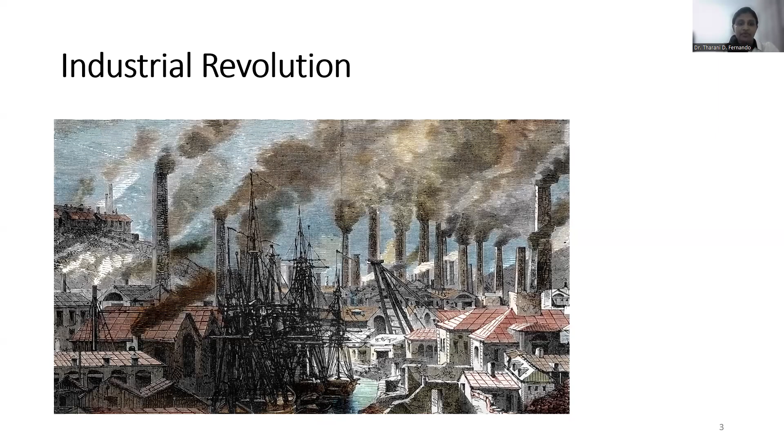Industrial wastewater is one of the major sources contributing to water pollution today. Here you can see different types of industries. Different industries generate different types of wastewater, each containing a unique mix of contaminants. For example, textile factories, food processing plants, chemical industries all produce very different kinds of effluent.

Because of this variation, industrial wastewater is not something we can treat with one approach. The treatment method needs to be carefully designed considering the specific types of pollutants found in each industrial wastewater. So understanding the source and the composition of the wastewater is the first step towards effectively managing it.

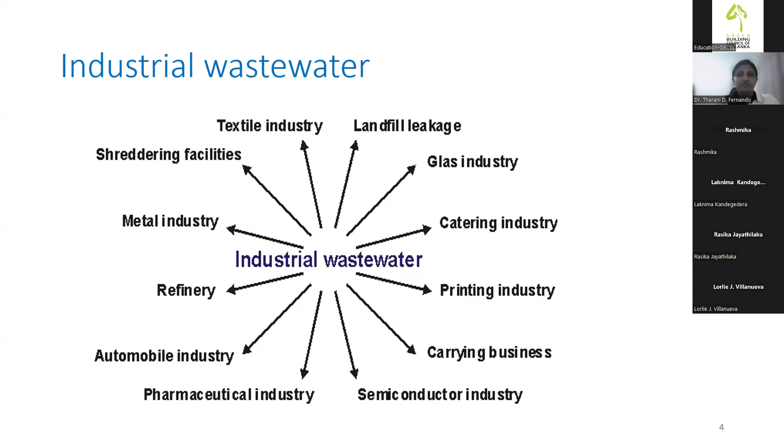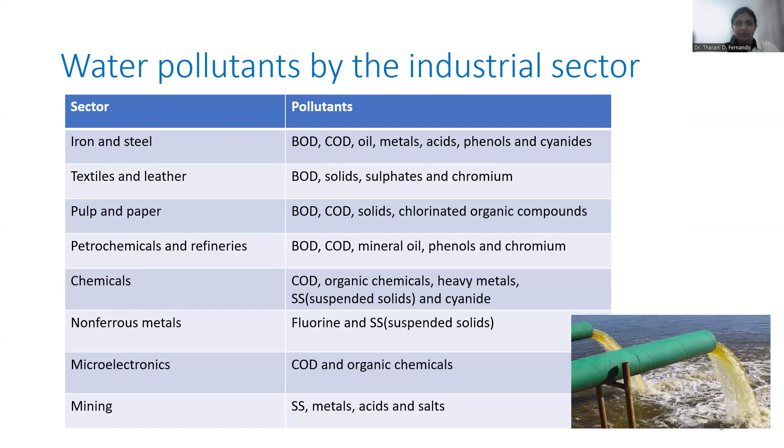As mentioned previously, here you can see the difference in the types of pollutants with the type of industry. Especially when we are talking about the iron and steel industry, you can see the pollutants, and for the chemical industry, you can see the pollutant types. These are not all pollutant types, but here I have mentioned the major pollutants from these industries.

I'm sure many of you have seen water bodies like this, where the surface is covered with a greenish layer. You might have wondered, what is that? Those are algal blooms. To grow rapidly like that, they need the right conditions. What are those right conditions? Right conditions are sunlight and nutrients.

When industrial wastewater is released into water bodies, especially if rich in nitrates and phosphate, it creates a perfect environment for these algal populations. This can lead to excessive algal growth, which we call eutrophication. That is the process here, eutrophication, and it has serious impact on aquatic life and water quality.

Now, after these algal blooms die, they don't just disappear. They sink to the bottom of the lake, and that's where microorganisms start breaking them down, especially aerobic bacteria. During this process, they use dissolved oxygen in the water for degradation. As more algal population decomposes, more dissolved oxygen is consumed by these microorganisms, and the oxygen level in the water starts to drop significantly.

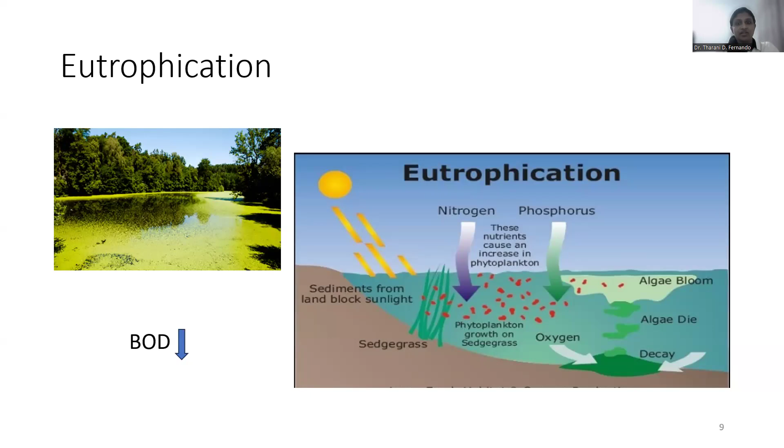That is a sign that the ecosystem is under stress. On the other hand, this lack of oxygen is very harmful to aquatic life, especially for fish and other organisms that depend on oxygen.

Now, in addition to nutrients like nitrate and phosphates, industrial wastewater can also contain some highly dangerous substances. First, we have heavy metals such as mercury, lead, cadmium, and arsenic. These metals don't break down easily and can accumulate in the food chain over time, reaching humans through fish and other aquatic life.

Next are toxic organic pollutants, things like pesticides, industrial solvents, and petrochemicals. These can cause serious health problems including cancer, hormone disruptions, and neurological diseases.

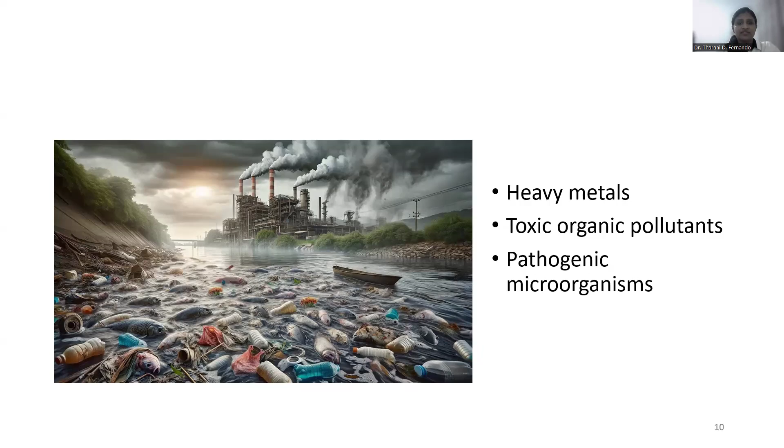And finally, in some cases, industrial effluents may also contain pathogenic microorganisms: disease causing bacteria like Vibrio cholerae and Salmonella typhi, viruses like hepatitis, or parasites. When these enter our water bodies, they pose a direct threat to public health, especially in communities that rely on these sources for drinking and bathing purposes.

These heavy metals and pathogenic microorganisms not only contribute to human diseases and even deaths, but they also have a broader impact beyond health. They affect the country's economy by increasing healthcare costs, raising the expenses for wastewater treatment, and even causing a decline in tourism, especially in areas where water bodies are polluted or unsafe.

These species are placed under serious risk as aquatic organisms are threatened due to this wastewater pollution. This is inhibiting the activities of these aquatic organisms and also poisoning their food sources, which can also be a cause for the extinction of these aquatic organisms.

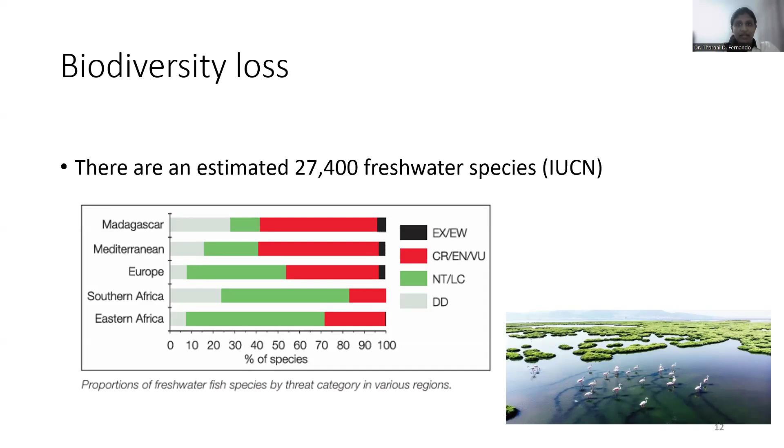To control these harmful discharges and to protect not just the environment but also human health and the economy, there must be strong legislative frameworks. Laws and regulations are essential to monitor, manage, and minimize industrial wastewater pollution. Considering the rapid advancement in industrial technologies and evolving environmental needs, several amendments have been made to existing regulations over time, starting from as far back as 1980.

One key step was taken under the National Environmental Act number 53 in 2000, which identified specific industrial activities that require an environmental protection license. But even that was not enough, so the act was further amended in 2008 and again in 2022 to keep up with changing industrial practices.

Under environmental laws, certain industries need to follow key steps like getting an environmental protection license if their activities could seriously affect the environment, as outlined in gazette number 2264. If they deal with hazardous waste, they must have a scheduled waste management license. And for large developing projects, an environmental impact assessment has to be done before starting these industries, based on the guidelines in the relevant gazettes.

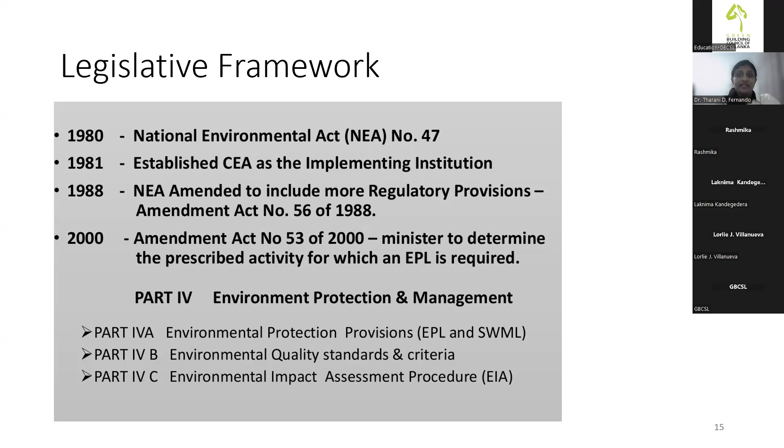Effluent monitoring and industrial inspections play an important role in controlling industrial water pollution. When it comes to enforcement, high and medium pollutant industries are monitored by the Central Environmental Authority, while low pollutant industries are monitored by local government authorities.

Regular inspections are also conducted. For high polluting industries, the environmental protection license is issued for a maximum of 1 year and inspections are done twice a year. For medium pollutant industries, inspections are carried out once a year.

In addition to that, industries are required to submit self-monitoring reports. These reports must include results from Central Environmental Authority registered laboratories as well as one report submitted to the Central Environmental Authority online. High pollutant industries must submit a report on a quarterly basis, while medium pollutant ones submit their reports biannually or annually depending on the risk level. These systems ensure that industries are kept within the safe limits.

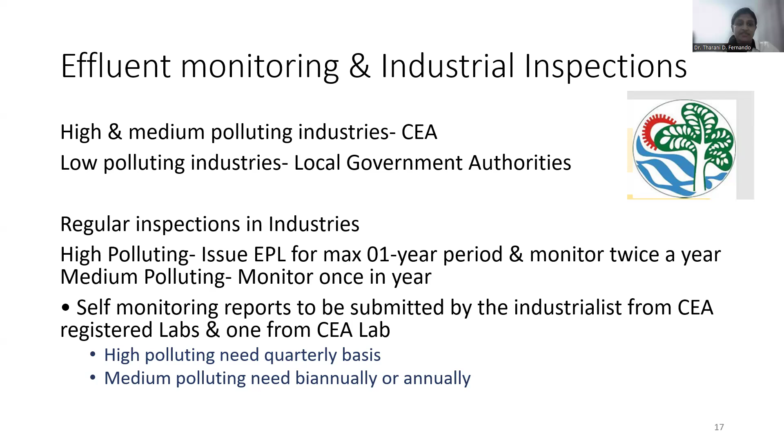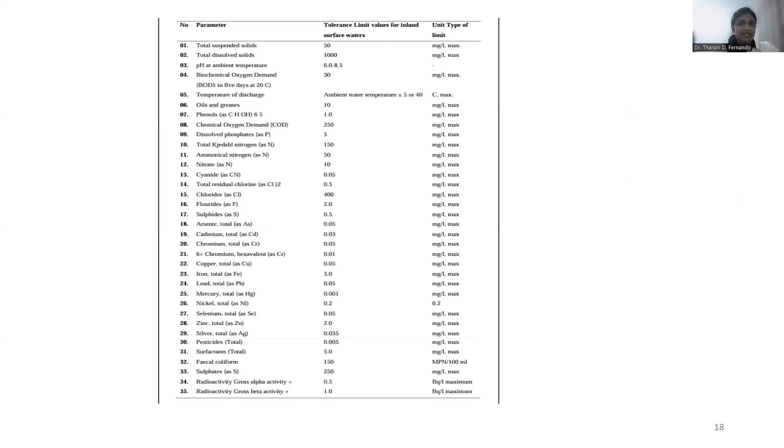Here you can see the tolerance limit values for inland water discharges. These values are taken from the BOI zone in Biyagama, especially from the common wastewater treatment plant. These limits are set to ensure environmental safety standards and minimize harm to the environment and human health.

So, to ensure safety, industries must treat their wastewater before discharging it into natural waterways. A general wastewater treatment plant has four main stages: preliminary, primary, secondary, and tertiary treatment. As we move from the preliminary stage to the tertiary stage, both the complexity and the cost of the treatment processes increase. Preliminary treatment involves basic physical processes like screening and grit removal. Primary and secondary treatment focuses more on settling solids and biological treatments. Tertiary treatment is used when very high water purity is needed, depending on the type of industry.

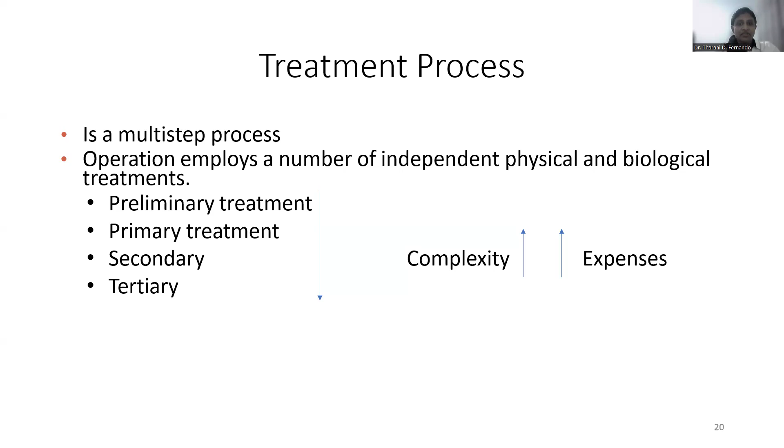Now, let's talk about the techniques used in the preliminary treatment stage. These include bar screening, grit removal, fat and grease removal. Here you can see an image of a bar screening unit.

It's one of the simplest engineering processes in wastewater treatment, but a very important one. Bar screens are placed at the very beginning of the treatment plant. The job of this bar screening is to remove large solid materials like pieces of wood, plastics that could damage or block pumps and other equipment in this wastewater treatment plant. And this step protects the rest of the treatment system.

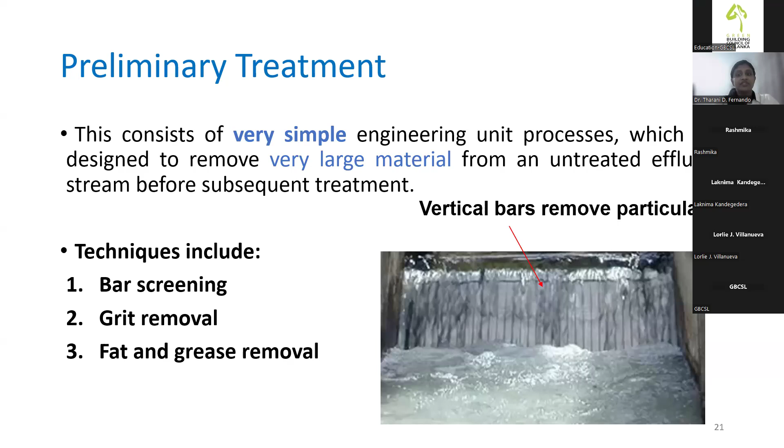This is a grit chamber, which is used in a preliminary treatment stage to remove grit from wastewater. Just like bar screening, grit removal is essential because if these particles are not removed, they can cause serious damage to pumps, pipelines, and other mechanical parts in the treatment plant. Grits include unwanted materials like sands, gravel, some stones, and other heavy particles that have a higher specific gravity than the organic matter in this wastewater stream.

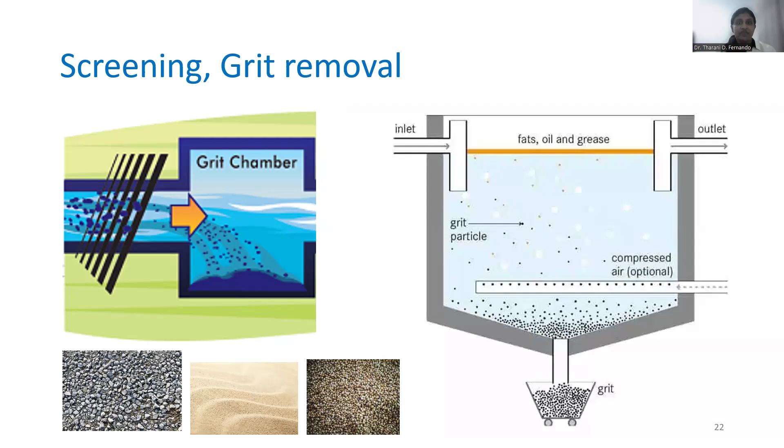Next, primary treatment stage. This involves the use of a sedimentation tank. In many industries, this stage also includes skimmers to remove fat, oil and grease from the surface of the water. Here in this picture, you can see a skimmer working on the surface of the sedimentation tank. During primary treatment, the wastewater is kept in the sedimentation tank for a few hours, normally between 1.5 to 2.5 hours to settle down the suspended solids.

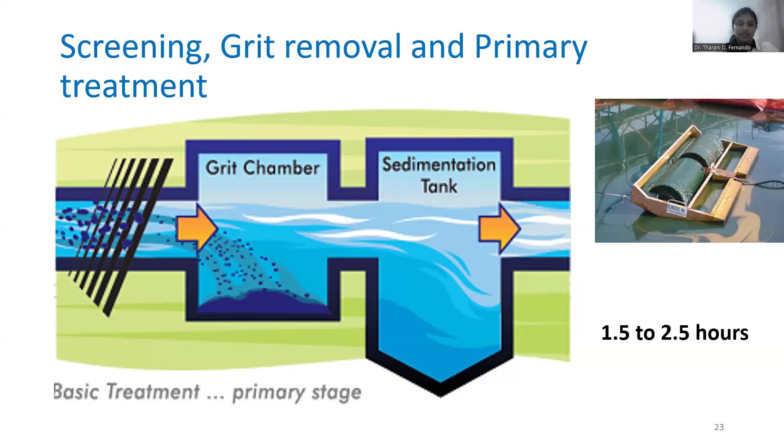Okay, now we are talking about primary treatment. A well-designed and properly operated sedimentation tank can remove about 25% to 40% of BOD. BOD means biological oxygen demand, indicating the organic content in water. And also around 50 to 70% of suspended solids. To improve the removal of solids, industries usually add flocculants or polymers to sedimentation tanks.

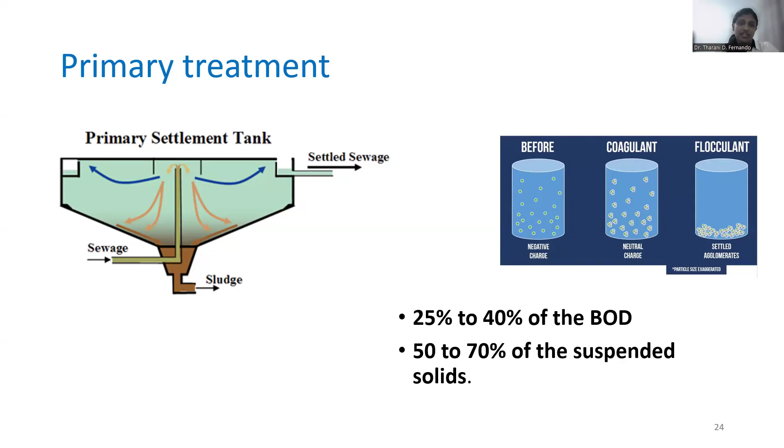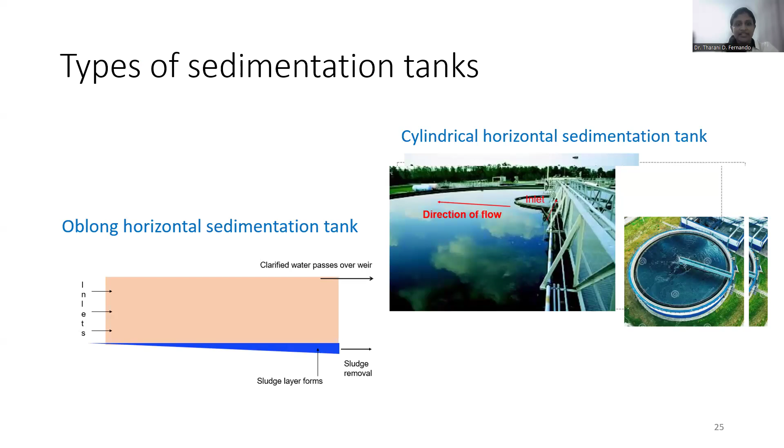Here you can see different types of sedimentation tanks: oblong horizontal sedimentation tanks and cylindrical horizontal sedimentation tanks, depending on the shape of the sedimentation tank. We discussed preliminary treatment and primary treatment. These are very simple techniques.

After the primary treatment, the water moves to the secondary treatment stage. This is a biological treatment process. In previous stages, we didn't use biological treatment processes. In this stage, we are using biological treatment processes. The main objective of this secondary treatment is to reduce biological oxygen demand, meaning to reduce the organic content in water. In industrial wastewater, the BOD level is very high, often around 1500 milligrams per liter. Through secondary treatment, this is brought down significantly, usually to the range of 5 to 30 milligrams per liter.

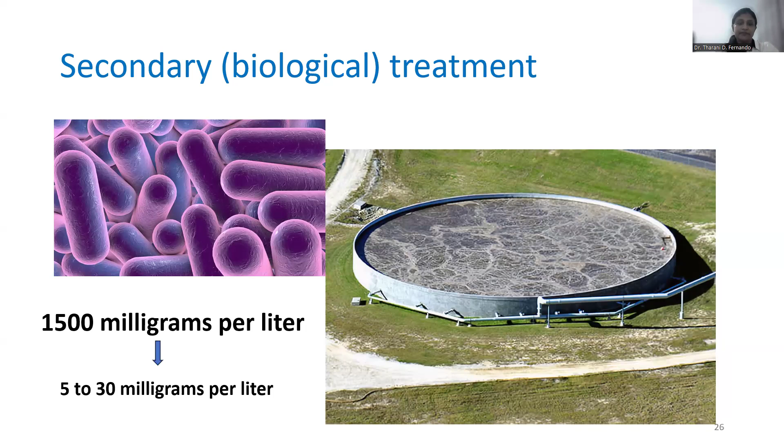The secondary treatment takes place in two main environments: aerobic condition and anaerobic condition. Aerobic conditions mean oxygen-available conditions. Anaerobic conditions mean oxygen-unavailable conditions. This type of environment has a significant impact on the treatment process. It affects three key aspects: the efficiency of the biological treatment, end products, and the completeness of breaking down of organic matter. So choosing the right environment is important depending on the treatment goals and the nature of the wastewater.

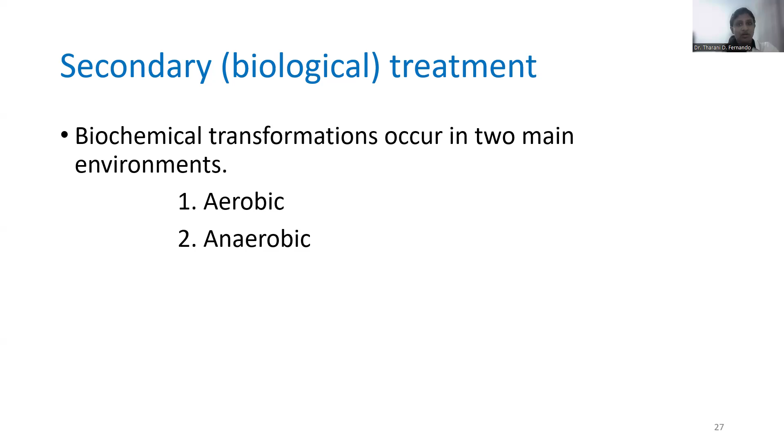When we talk about secondary treatment, in this session I am mainly focused on aerobic conditions. There are two main types: attached culture systems and suspended culture systems. In attached culture systems, the biomass grows on the surface of a medium or inside the medium, and the sewage flows over it. Two common examples of attached culture systems are trickling filters and rotating biological contactors.

Next one is the suspended culture system. Here, the biomass is mixed directly with the wastewater. Common examples are the activated sludge system and oxidation ditch. Each system has its own advantages depending on the design and the treatment goals.

In this video, you can see a trickling filter. That is an attached culture system. The rotating arms are sprinkling wastewater evenly over this bed, especially with stone media. This is non-toxic media for microorganisms. Microorganisms grow on the surface and inside this material. Okay, you can see a cross section of this trickling filter here. As the wastewater passes over it, biological degradation of the organic matter is happening.

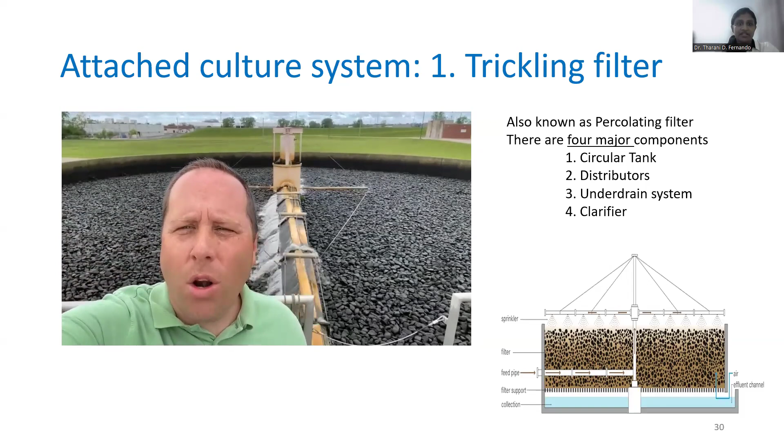Next, rotating biological reactor. This is the second example for attached culture system. In this system, microorganisms also grow on the surface and inside the rotating disc. Here, in industrial waste management systems, people are using discs in these rotating biological reactors. These discs are partially submerged in water, usually about 40%.

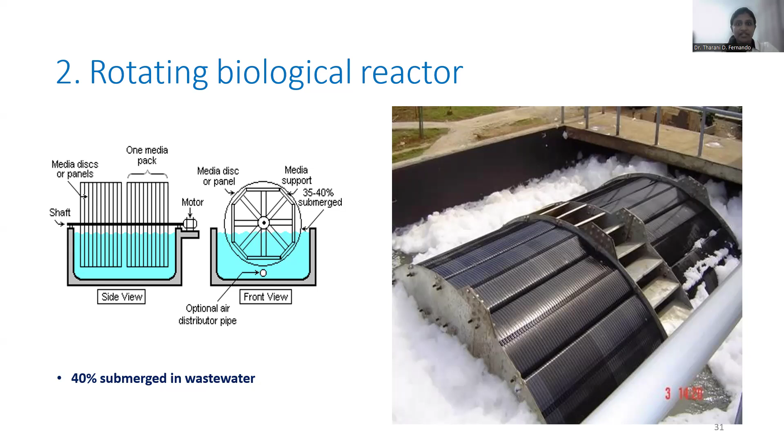When the disc is rotating, the biofilm, meaning the microorganisms on the surface of this disc, come into contact with both the wastewater and the atmosphere. When they are coming to the atmosphere, they can obtain oxygen. So far, we have been discussing the attached culture system. In the attached culture system, we discussed the trickling filter and rotating biological reactor.

In contrast to this attached culture system, in the suspended culture system, the wastewater is fully mixed with the microorganisms. There's a mixing of microorganisms and the wastewater. This allows for better contact between the organic matter and the microbes, and this enhances the efficiency of the treatment process. Here we can obtain 90 to 95% BOD reduction.

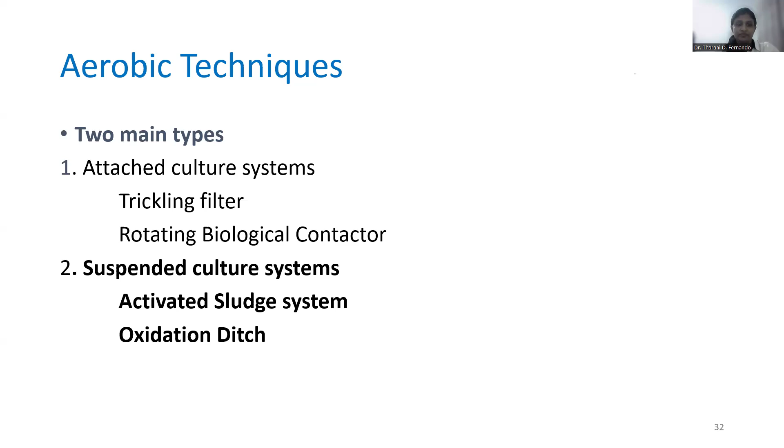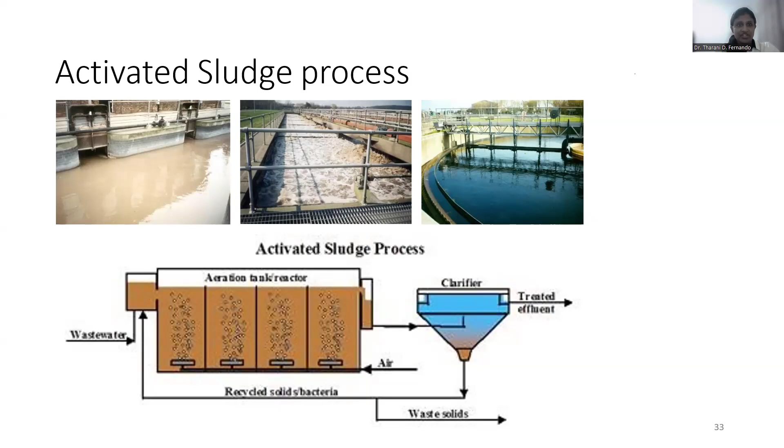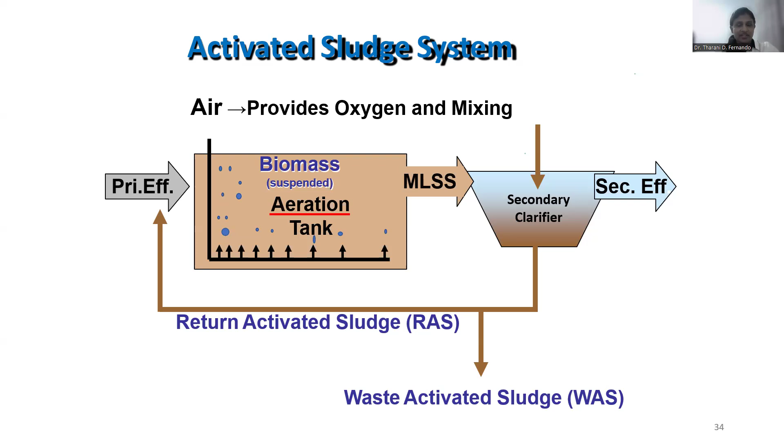In the activated sludge system, some of the activated sludge is returned to the aeration tank. This keeps a strong population of activated microbes in the tank that are ready to break down organic pollutants very effectively. In this picture you can see activated sludge returning into the aeration tank. This activated sludge is from the secondary clarifier.

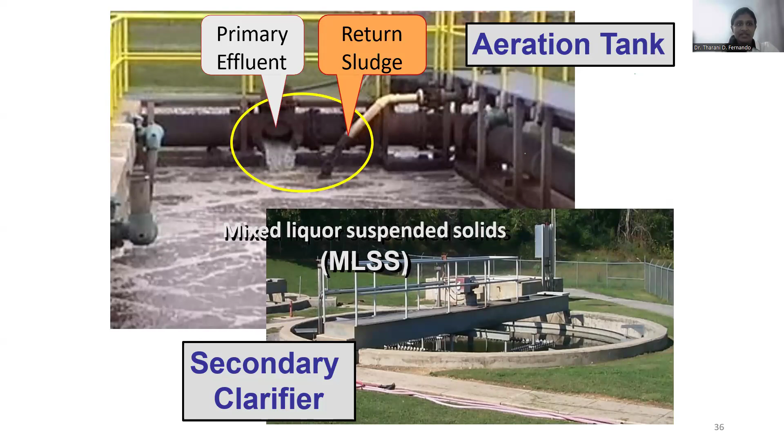Here you can see the aeration tank, secondary clarifier, primary effluents, and return sludge mixing and forming mixed liquor suspended solids. After the secondary clarification, we obtain a clear looking solution. Like this, we can obtain a clear looking solution.

However, even though it appears clear, it is important to verify its quality through laboratory analysis before releasing it into the natural waterways. This is to ensure that it meets regulatory guidelines for environmental safety. That is the reason for that. If needed, we can also proceed with tertiary treatment to further polish this effluent.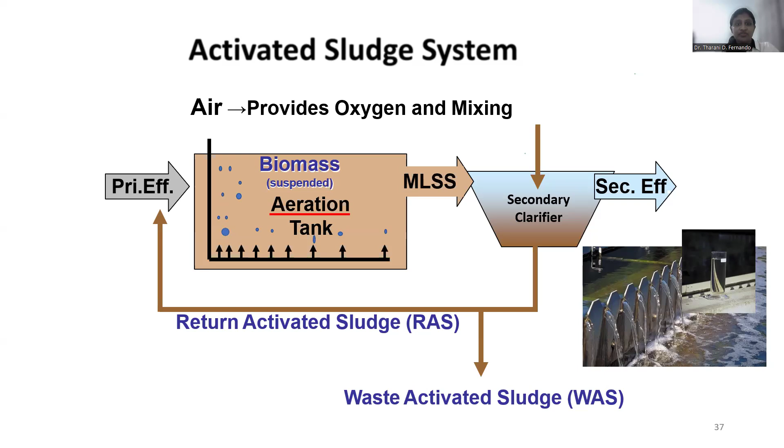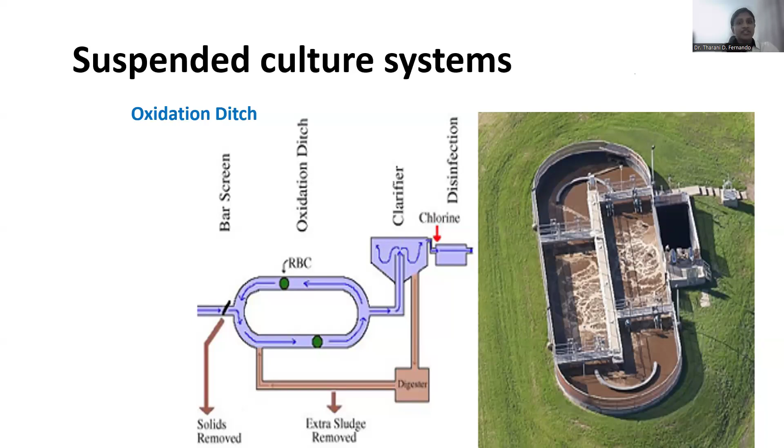This is an oxidation ditch. This is the second example for the suspended culture system. Oxidation ditch is a special type of activated sludge system used in biological wastewater treatment. It has a comparatively high retention time, which enhances the removal of biodegradable organic matter. In this system, the only pre-treatment usually used is a bar screen. After that, the wastewater flows directly into the oxidation ditch.

Here you can see a video of an oxidation ditch. The ditch is a circular, oval shaped basin. For the biological degradation of organic compounds in wastewater, activated sludge is added to this. Sorry, when talking about this oxidation ditch, its retention time is higher than other aeration basins. So we can reduce the BOD content in water to a higher extent using this oxidation ditch.

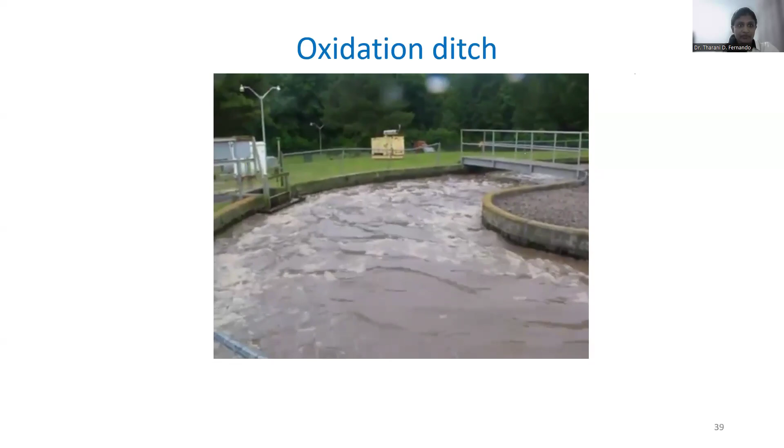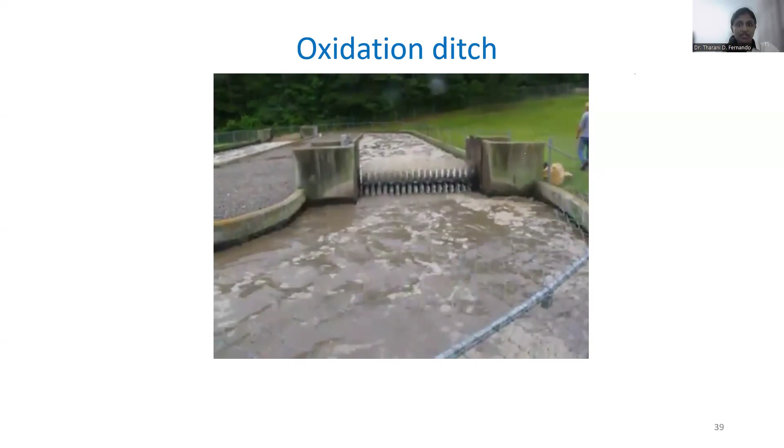You can see the flow of water in this oxidation ditch system. During this flow of the water, the organic content in this wastewater can be reduced. Because of that, we can reduce the BOD content. BOD means biological oxygen demand. Before the treated water is released into the maturation pond, it often undergoes chlorination. This helps to remove any remaining pathogenic microorganisms in this water.

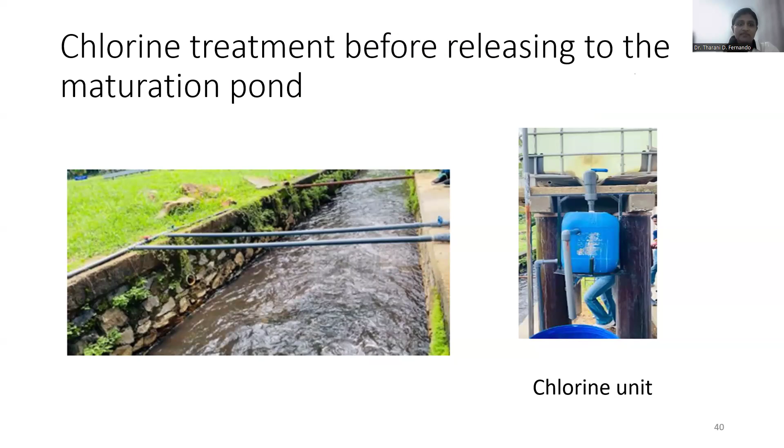So, what is this maturation pond? Here you can see a photo of a maturation pond. Maturation pond is the final stage in wastewater treatment. Here the water goes through natural purification through sunlight, microbial activities, and sedimentation processes. This normally consists of two reservoirs with 2-day retention time, and it is used to remove pathogenic microorganisms and remaining nutrients in this wastewater.

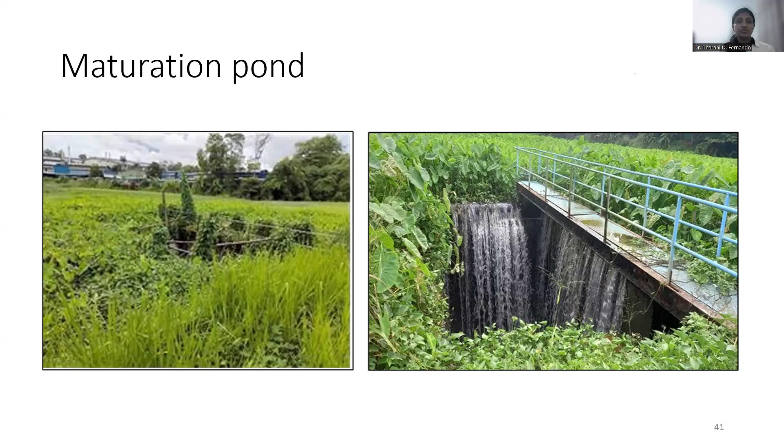Also, phytoremediation plays a significant role here because plants help to absorb and break down pollutants in water. After these treatments, the clean water is released into natural waterways through a canal system. Usually, the water that's discharged after treatment is better in quality. But if the treated water doesn't meet the required standards, it has to undergo tertiary treatment.

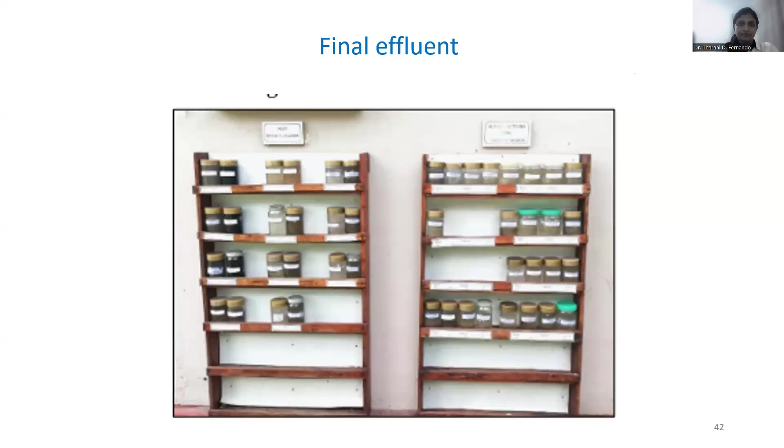Tertiary treatment is the final polishing step in the wastewater treatment process. It takes place after secondary treatment and uses chemicals or physiochemical methods to further reduce BOD, bacteria, suspended solids, toxic substances, and nutrients in treated water. This step becomes especially important when we need a high quality effluent, depending on the final usage.

I am receiving some messages.

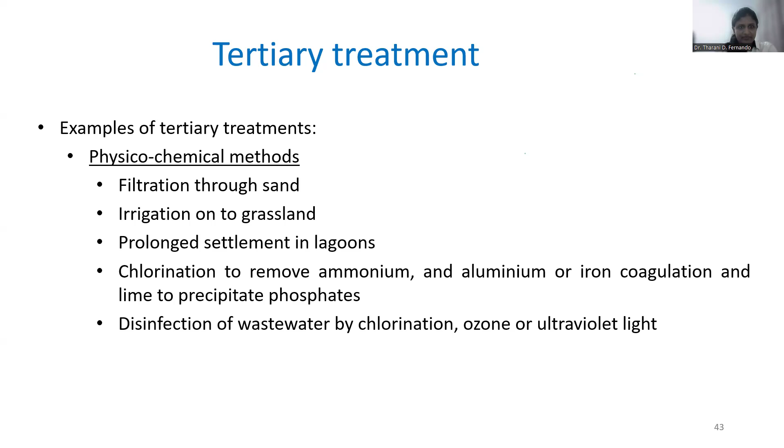In wastewater treatment, tertiary processes use advanced technologies to achieve higher water quality standards. Some examples of these advanced technologies include membrane filtration, UV disinfection, activated carbon adsorption, and advanced oxidation processes, which we can also call AOP. Each of these plays a key role in ensuring the treated water is clean, safe, and suitable for discharge into natural waterways, because we need to worry about the quality of the water we are releasing into natural waterways.

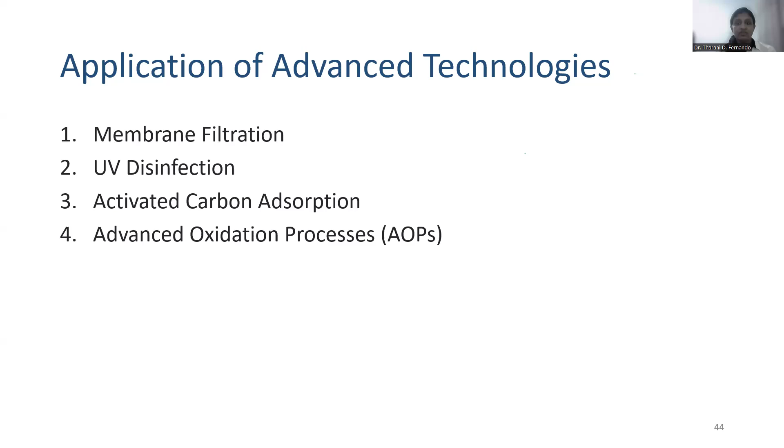So this is membrane filtration. There are four main types. They are classified based on the size of the particles they remove from the water. Let's talk about these filtration techniques. The first one is RO filtration. You already know about this technique; RO filtration gives the finest filtration.

Next one is nanofiltration, which allows small ions but blocks organic compounds. Ultrafiltration blocks larger molecules like proteins, fats, and polysaccharides. Next one is microfiltration, which has the largest pore size among all four types. It's mainly used to remove suspended solids, bacteria, and fat globules.

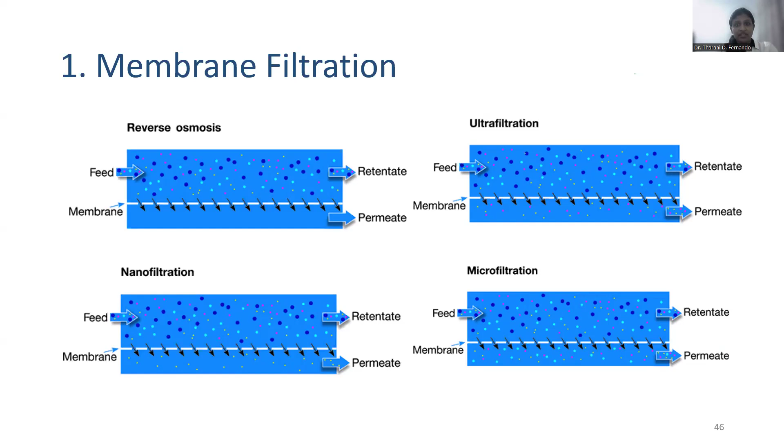Next advanced technology is UV light, UV disinfection. This is now widely used as an effective and eco-friendly method to disinfect wastewater. Through this, we can inactivate harmful microorganisms without chemical treatment processes. This disinfection process doesn't add anything to our water, doesn't change its chemical makeup or oxygen levels, and doesn't produce any harmful disinfection byproducts. So this is a very important disinfection technique.

One important advantage of UV disinfection over chlorine is its ability to inactivate chlorine-resistant protozoa. These organisms pose significant risk to public health but could not be eliminated with chlorine treatment.

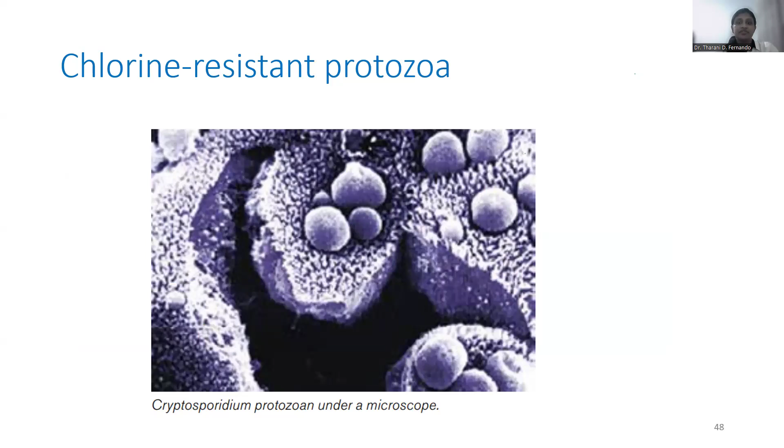Next, activated carbon adsorption. Activated carbon is a highly porous material, which means it has a huge surface area that can adsorb, not absorb, various pollutants. Using this porous material, we can remove pollutants by the process of adsorption. It is ideal for removing organic pollutants, heavy metals, and pharmaceutical products from our wastewater. This is a powerful tool in advanced wastewater treatment.

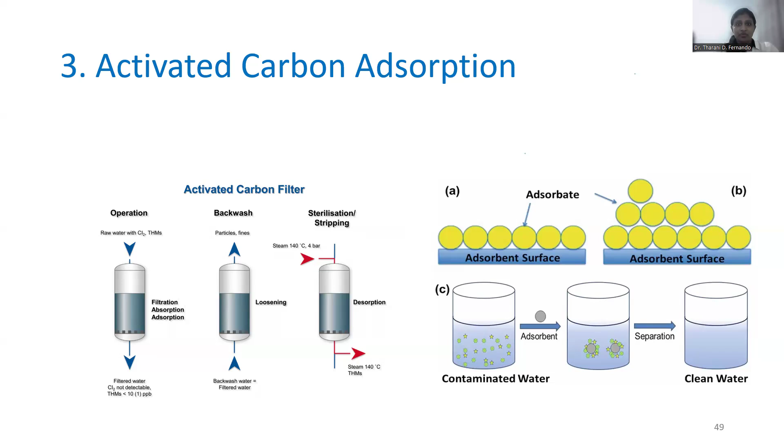Many researchers do research regarding activated carbon for toxic removal and pollutant removal. Also, advanced oxidation processes can be used to remove contaminants in water. These processes involve a combination of oxidants and UV light to degrade complex organic pollutants to non-toxic and simple compounds. There are two main types: hydroxyl radical-based advanced oxidation processes and sulfate radical-based advanced oxidation processes.

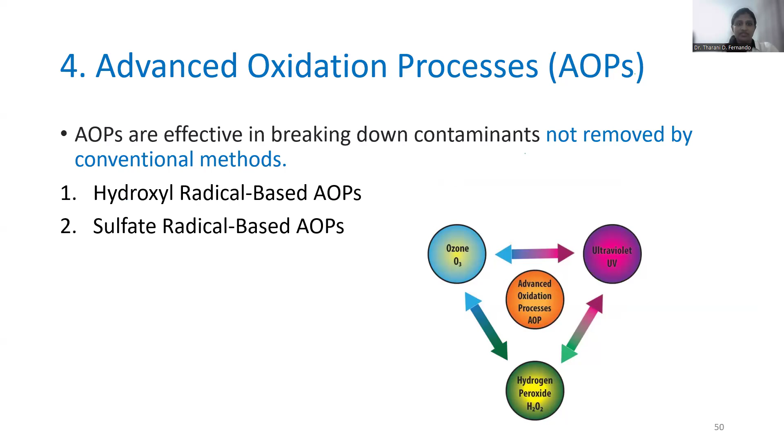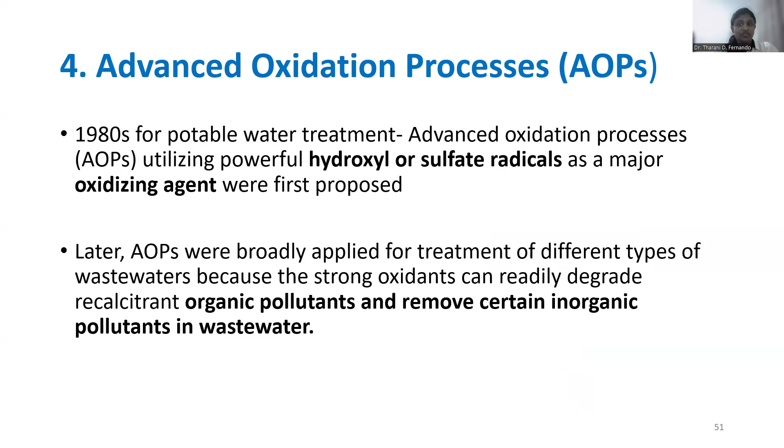Advanced oxidation processes, or AOPs, were first introduced in the 1980s mainly for potable water treatment, not for wastewater treatment. These processes use very powerful oxidizing agents, especially hydroxyl or sulfate radicals, to break down contaminants in water. Later on, AOPs became widely used in wastewater treatment because these strong radicals can effectively remove some pollutants that could not be handled by other methods.

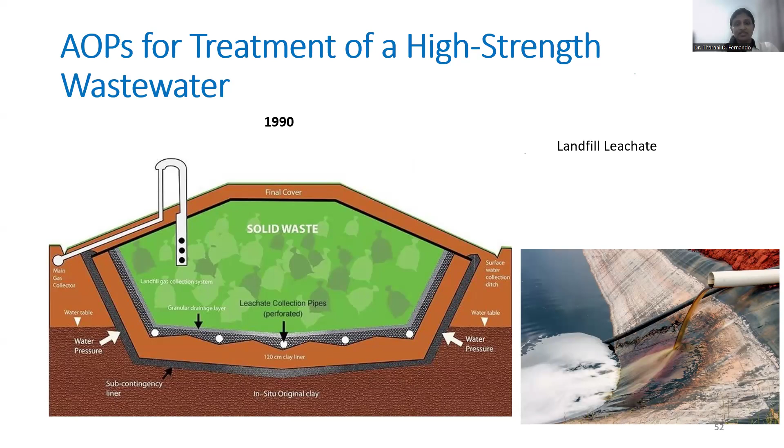In the 1990s, advanced oxidation processes were first used to treat landfill leachate, which is one of the most challenging types of wastewater. Here you can see a sanitary landfill. According to their system, they need to collect leachate from this sanitary landfill. This leachate consists of different types of hazardous pollutants. Using these advanced oxidation processes, we can remove these pollutants in the leachate.

So this is the end of today's talk. We talked about cleaner water solution strategies and the consequences of water pollution, and also some advanced technologies that can be implemented to remove pollutants in water. Clean water solutions require a combination of technology, awareness, and responsibility. Not only technology, not only responsibility, not only awareness; we need a combination of all these factors.

Clean water is not just a resource, it is a right. With innovative treatment techniques and a strong commitment to sustainability, we can protect our water for future generations.